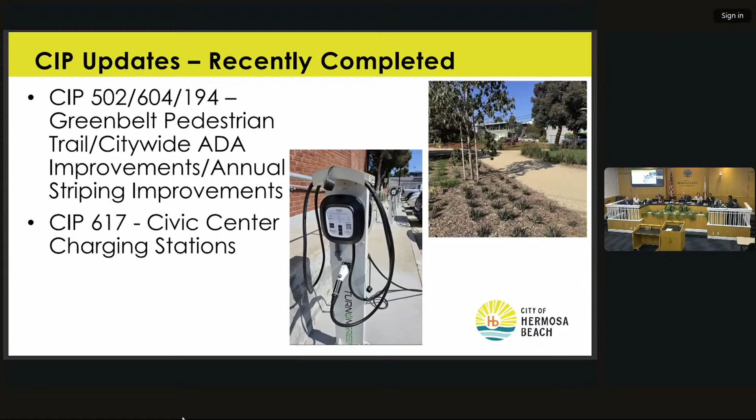Moving on to projects that are near completion. One of the projects I want to present an update on is the Clark Building renovations. We're expecting completion for the Clark Building next week. We have the final electrical inspection scheduled for later this week, and the final building inspection scheduled for early next week. That project was slightly delayed initially due to getting permitting from Southern California Edison.

Later on there was some equipment that came damaged, and we were just waiting for that long lead item to be delivered. It was delivered this week. It's being completed, installation, and we are looking forward to the final inspections. The equipment that was damaged was specialty lighting fixtures that also serve as emergency backup lighting, similar to the setup in here, around the edge of the council chamber wall and ceilings. Yeah, they're the linear light fixtures.

The next project nearing completion is the annual paving project, which included Lot A paving. The only item pending is final striping in certain locations. We're waiting to get the striping contractor scheduled for the final locations. The major portions—Pier Avenue, Valley Drive, Lot A—all the striping's been completed. There are a few remaining items where striping and signage is still pending.

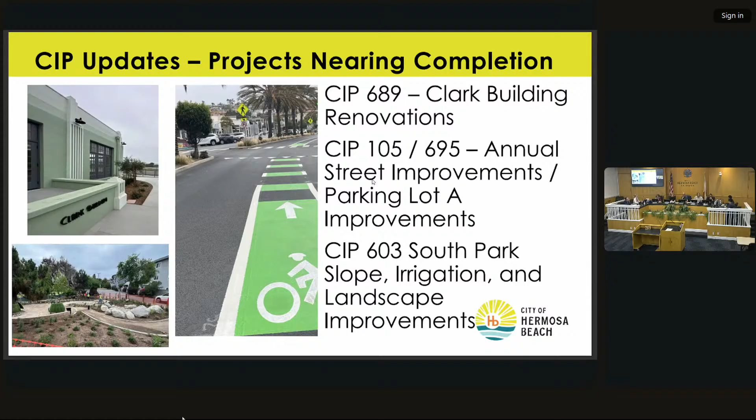I wanted to move along to some projects that are going to be awarded soon. We are planning to bring the Greenwich Village North Undergrounding Project to City Council for award this coming Tuesday.

And then CIP 630, the Community Center Gas Repair Project, is currently being advertised. We're expecting that to be bid opening later in August, then taking that to City Council in September, with construction starting in October.

As I mentioned earlier, Base 3 electrical improvements—that project's contractor has been selected. It's going to be on a faster timescale. It doesn't need to be taken to City Council for contract award, so the City Manager has authorization to award it, and we're looking to wrap that up in the next couple of months.

Kelly Courts improvements—we have finalized the design for Kelly Courts. It's set for advertisement next week, and it'll be bidding for about a month. We'll get that back, with start of construction for Kelly Courts slated for October 2025.

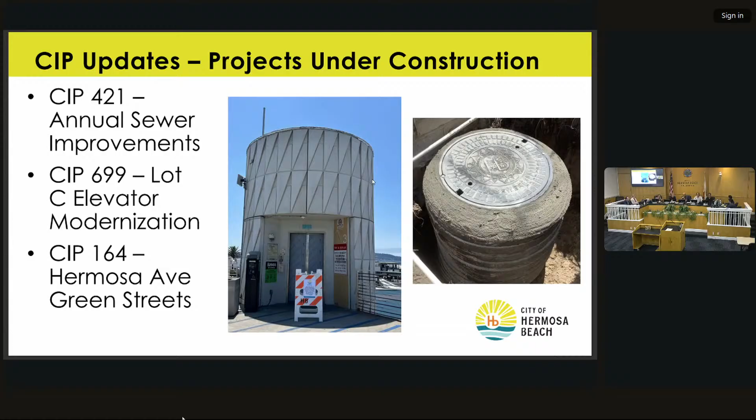And lastly, I wanted to touch base on projects that are in preliminary design. CIP 623, the next phase of pier structural repairs, we've received the design proposal and will be reviewing it to move forward. This design phase, similar to the last pier project, is expected to take at least about a year, and it will go through the Coastal Commission, which is a lengthy process. We wanted to get ahead of that, getting design done while we've already budgeted for construction later in the fiscal year.

The next project is the Real-Time Crime Center. Public Works is supporting the Police Department on the federal grant that's been received, providing support in evaluating contractors and ensuring federal grant provisions are met in the selection of camera installers.

Lastly, the update for CIP 111, the gateway and wayfinding signs project, which is in conceptual design. We were working with the designer to finalize the design scope, and that's been done. They're underway with the remaining portions of conceptual design. We're expecting them to present their findings with new updates before Public Works Commission prior to taking them to City Council.

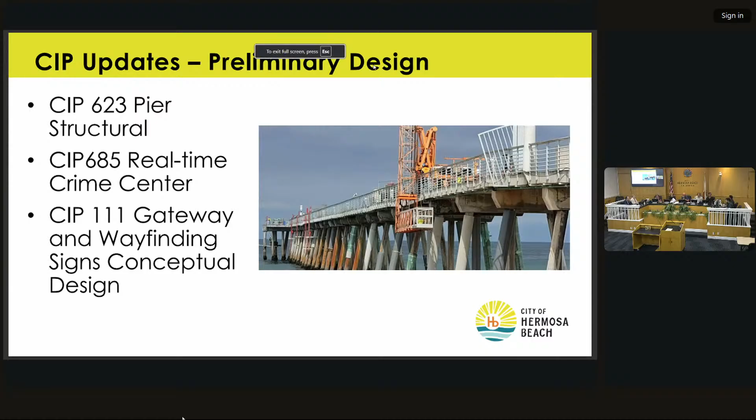No response to public comment. Any brief announcements or reports on subcommittee roles? Any comments on matters within the jurisdiction of the commission?

I have one quick question. At some point recently, they put a stop sign at the intersection of Monterey and Herondo. You know what I'm talking about? It was added about two years ago - it was a side street only, one-way stop, and Redondo added it. That intersection is mostly Redondo, is it not? We own the city limits, which are really the northerly sidewalk and the parking lane, so the majority of it lies in Redondo. I was going through there and it could use some rapid flashing beacons, but that's not under our purview apparently. Unfortunately, they're not compatible with all-way stop control - you can only put the RRFB system on a yield control intersection. The only other potential upgrade - there are other mitigating options, but that would not be an option at that location. Good to know.

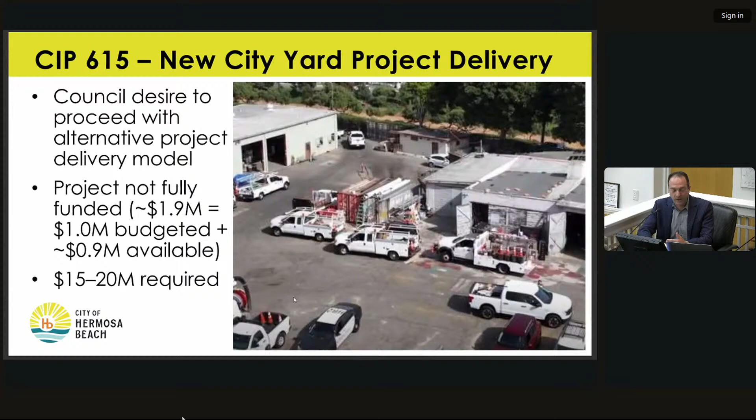And so with that, I'm going to introduce John Osqui, one of our senior consulting engineers that works very closely with our city team, who's going to take the commission through the two different delivery options in a little bit more detail. John, would you like the pointer or the clicker? Oh, yeah, please.

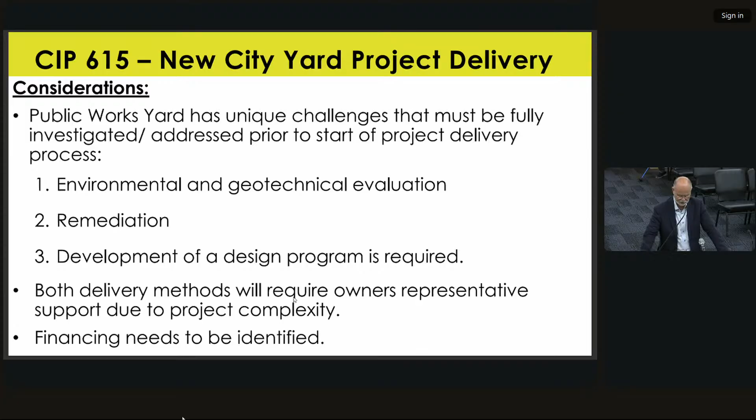As I mentioned in this slide, we try to outline for both options - option 1, which is the design-bid-build, and option 2, which is a progressive design-build, generally referred to as a PDB - the timeline for implementation, the different phases, and sequencing of the work.

You can see that the first order of business is environmental investigation. How do we do that? We go through a process of hiring a qualified consultant, which is called a request for qualification.

We're going to define what it is that we want to get done, then invite the qualified consultants to come in and provide a proposal to the city. We hire the most qualified consultant. By the way, as far as professional services, the law in the state of California states that you don't necessarily have to go with the lowest price that a professional consultant provides.

The basis of your selection is their qualifications - it's called qualification-based selection, QBS. So we hire the one consultant that we think is going to provide the best benefits for the product that we want to deliver.

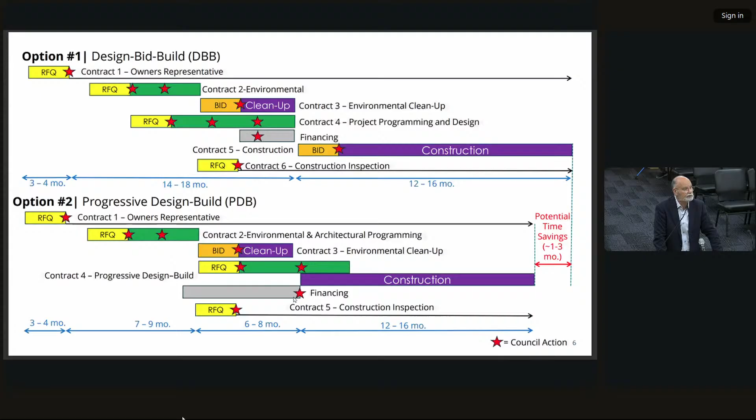We touched on that a little bit, but the selected approach will greatly depend on priorities of the city. We have to finally decide which project delivery method is the correct one for us. And something that worked for other entities won't necessarily work for us successfully, and vice versa.

Timeline: if the timeline is the goal, reducing the timeline, getting the project done in an expeditious manner, then the progressive design build should be considered seriously. If the goal is to have more control over the design process, and competitive bidding is preferred, then the design bid build, the traditional model, might be a better choice.

If the transfer of risk to the builder is a goal, then we probably have a better choice if we selected the progressive design build. But again, I qualified all of those as I discussed previously. It's not an absolute term.

As far as the budget is concerned, the progressive design build offers effective cost management due to its integrated approach, because all along the design process, the city is involved and you are looking at the cost for the contractor. But you have to keep in mind that at the end of the day, the contractor is there to make their profit margins more attractive to them and not to the city. So because of that, it does not necessarily guarantee the lowest overall cost.

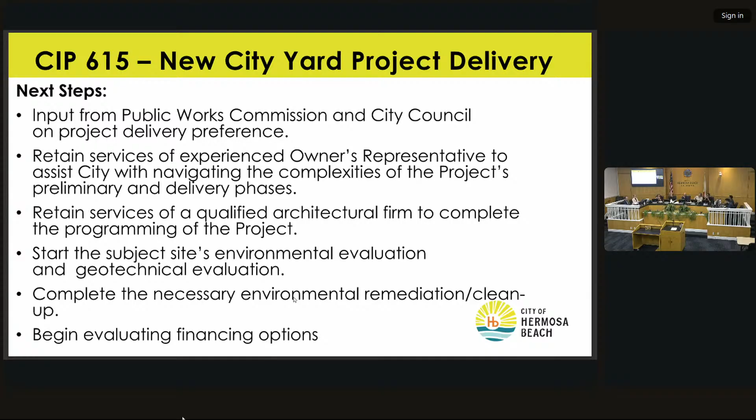Has anything been done with this at all? Has there been any assessment by staff or anyone else as far as what's needed? Or is this starting at the beginning? So,

Yes and no to all that. So we've been preparing, as you can see, we've laid out a plan of action, whether we go one road or the other to move this ahead.

There was a prior effort several years ago to take a look at, there was a CIP and there was preliminary design that was done. So we have an initial layout, but it was really a much more simplified proposal and it didn't really get into the detail that's needed. That was several years ago. Current operational needs and challenges are different than at that time when it was looked at.

And so we've had some preliminary look as we've started doing some of the facilities condition CIP with the Civic Center. We did start to look at some of the space needs, but it's very preliminary. We really need to get an architect team on board to really assess our needs. And when I say needs, it's the space configurations that John mentioned, like how many desks, how many parking spaces, but really looking at the flow of our yard, and that's something that we're going to have to work with the designer. How do we get a more efficient operation?

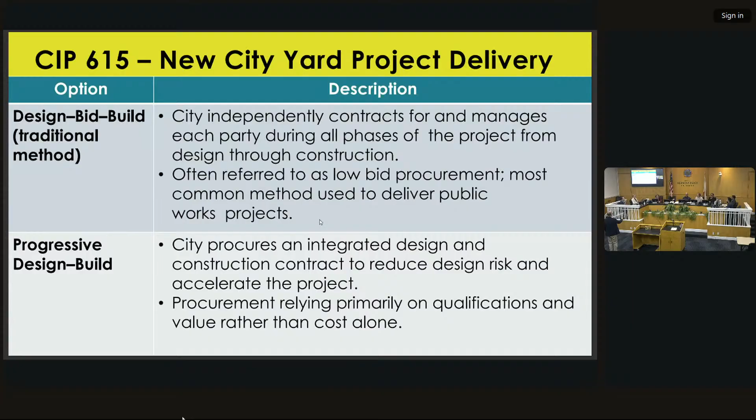I wanted to make sure you weren't discouraging doing too much design work early on, just because in progressive design build there's a lower required maturity level before moving forward. So if we wanted to, could we voluntarily, at additional architectural programming phase cost, do a little more work? Even though when we bring the design build contractor on they might say you're more mature than expected, maybe we could work with them on that, but we're not necessarily obligated to it. In other words, would we consider getting more value out of the architectural phase by extending it a bit to better define our needs and requirements?

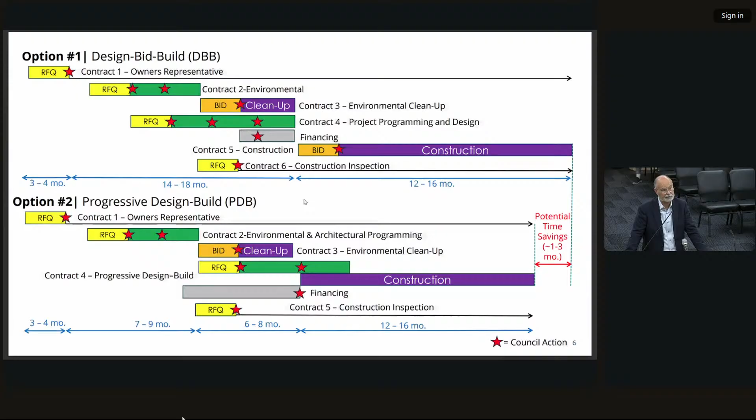There could be surprises. There could be a point where you're not going to agree with the price they come up with, but then you have to go through a lot of back and forth, examining the documents and the estimates they're providing. So there are no guarantees, Chairman, and that's where having a very strong team behind you is going to assist you. But the example you use is very different.

It was traditional design build. You had a number up front that was competitively bid. This was for a design build, right? Traditional design build, and in order for them to get that project, they had to submit a GMP as a bid. Yes, so you had a number, it was competitively bid at some point.

Yes. Whatever happened afterwards, that happens on every project. My question is, you're going to hire somebody just on qualifications, and they have no incentive to have a low price.

I think I mentioned that when hiring a design build team, either through the traditional or progressive model, we have to keep in mind that the driver in that scheme is the contractor, and the incentive for the contractor is to maximize their profit margin. That's just the reality. When you go to design bid build, that gets tempered a little because they have to compete against other contractors. In design build, they're competing as well.

Design build teams are competing against one another when submitting their proposal to you based not on price, because in a progressive model you're not getting a price up front, but based on their qualifications. Right, but traditional design build, they are also competing on price, correct? Yes, yes.

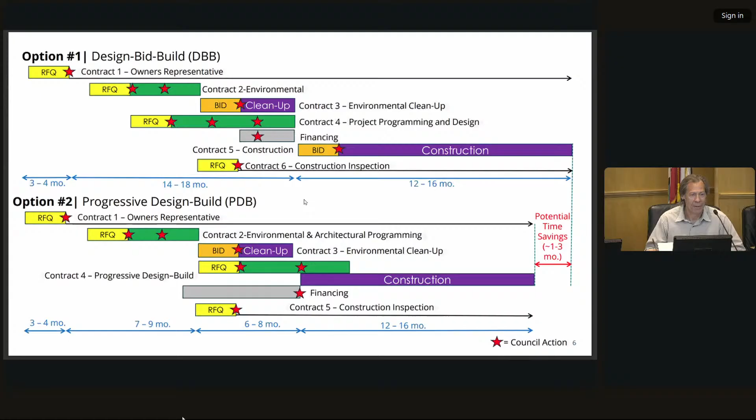The purpose of programming, again, as I alluded to and as Mr. Sanclemente mentioned, is based on your current needs and future needs—defining a picture of what the facility is going to look like, the square footages, adjacencies, those kinds of things. But as far as getting into the future relationship between the city and defining milestones for the future relationship with a design-build team, no, that's not part of that exercise.

Would we still be laying out a preliminary schedule for how we'd like to see the program unfold? Not as part of the architectural programming exercise, no. Okay, so in my opinion, the word 'programming' is a little misleading because it's more technical than it is programmatic, but okay. It's terminology that my architect friends use, and we stay with that. Okay, okay.

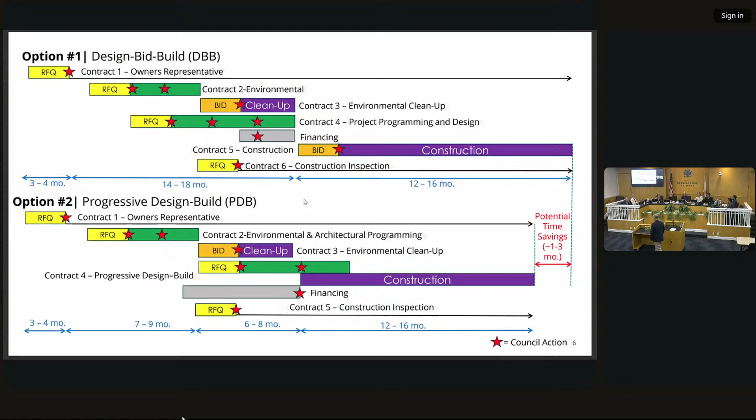All right, thank you. You're welcome. Anyone else? All right, do we have any public comment in the chambers?

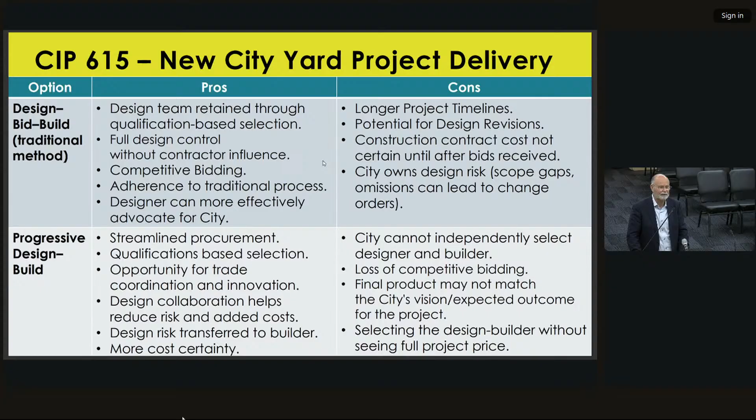I have a big problem with this, not in overall concept, but with how this would work in this city. I can't imagine the line of people who would, if this project went bad, be out that door and down the street saying, you guys went to contract without a final amount. How in the world could you commit the city to this? How do you award a contract without an amount? It's basically an open checkbook. And I'm not saying that's exactly what's happening here, but if this job goes bad, you're going to hear people say that. I really dislike the idea of not knowing even basic costs. What is the fee on the project going to be? What are the GCs on the project going to be? What's the design cost going to be? Without that information, I don't see how you go to contract.

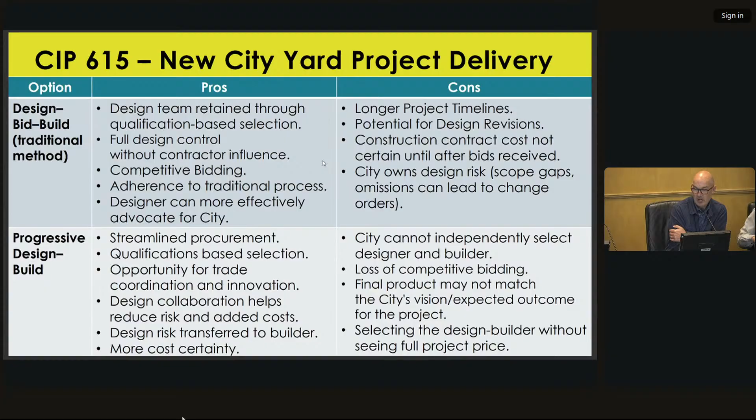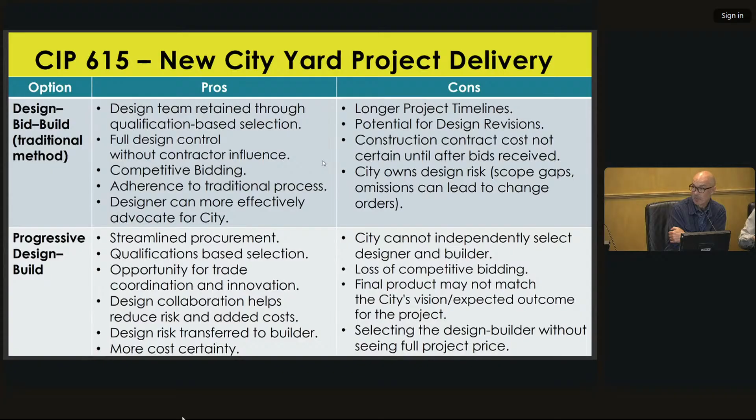We've seen on multiple projects, including the Kelly Court and the Clark Building, that the council likes to make changes and sometimes design from up here. Once you start a progressive design build contract, even in the early stages, the clock has started on that contract for that contractor. If the council makes changes, boom, next day, change order, delay. You said how important it is for a contractor to get in and get out. When council makes a change, they're going to have their hand out immediately. Everybody worries about change orders during the construction phase, but you're going to have change orders in the design phase too. I don't see how this turns out well for us here.

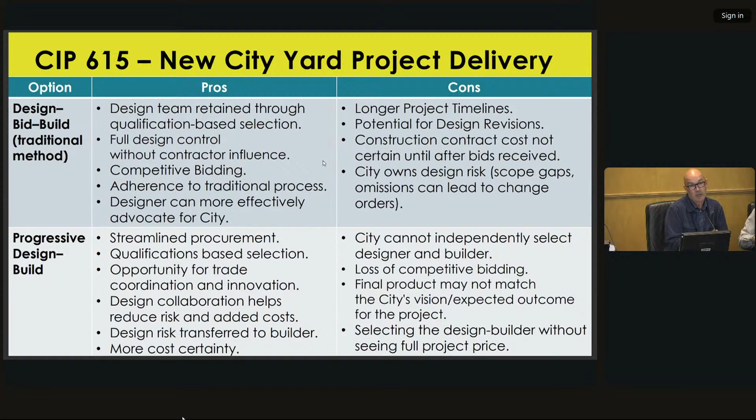David talked about the opportunity for city input. In my mind, you have just as much opportunity for city input with design bid build or design build. With design bid build, the city has input with the architect and all of the consultants as they're putting the plans together to get it ready for permit, and then it basically stops. Whereas with progressive design build, you're kind of more through it. So the city needs to do their homework and work with the design team up front. I don't think you lose anything as far as city input with design bid build. I really...

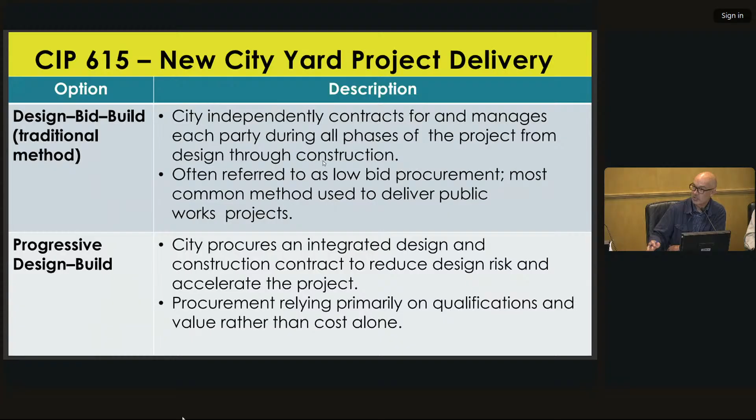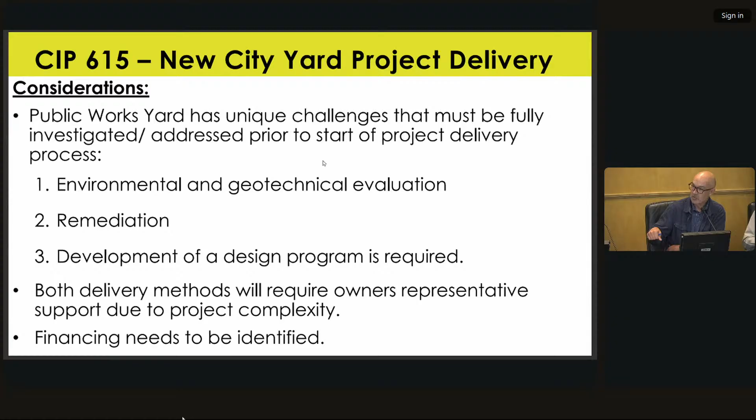My daytime job is I estimate construction projects. It's what I do for a living. And if you don't have a competitive situation, the contractor is going to put their thumb on the scale to protect themselves. They're going to put line item contingency in every line item, and then, oh yeah, we're giving back the contingency at the bottom, but all that line item contingency is still going to be there. And you have no way of knowing it.

I don't believe that the books are going to be as open as you think. I think you need to see every subcontractor bid. I think you've got a line in here about the construction manager will solicit bids from key trades. Why is it the construction manager? It should be the contractor. The contractor is the one with relationships. The construction manager is a retired guy who's got back into the business, and his relationships with the subcontractors are 5 years old. There's too many things, and I cannot support this.

I said, anybody else have any other comments? I just wondered if there's any response to that. To which part of the points, excellent points that were brought up. And I asked a question. Please, let him respond to mine, please.

If I may, before any of that, and in full transparency, I'm relying on ChatGPT with regards to the question you asked, which cities have completed a project through progressive design build. These are the lists that I have in front of me, and I don't know if the project has been completed or they have just started.

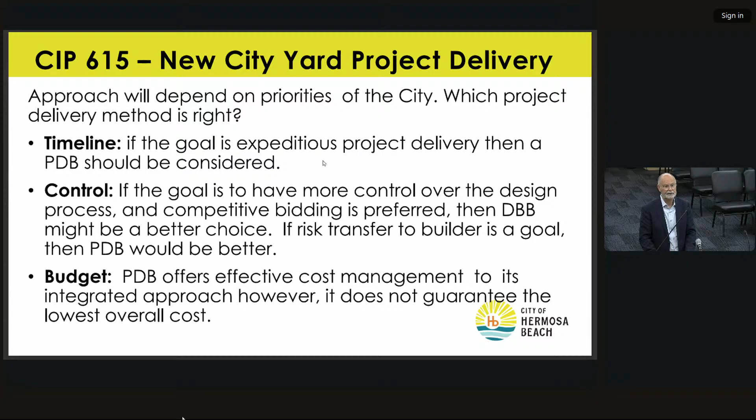Well, I think we are trying to paint a picture of all the pros and cons, and then based on that, urge you please to guide us to which way you think is the best way for the city to contemplate on completing this project. So Commissioner Britton asked for you to refute everything that I said and tell me how wrong I am. And I'd like to present that opportunity to you. I was nodding my head in agreement with everything that you were saying, Chairman.

So my understanding then is, I guess the point is, once we turn it over, the city loses control. And then the architect and the contractor do what they do, and we have no control after that point.

Commissioner Britton, I went back to the slide and put it up there for us to take a look again. Honestly, it all depends, and I think the chairman made a mention of this, how a model is best suited for a type of operation and decision-making process that we have. Some cities operate differently than others. I have witnessed, and I'm looking at it from the outside in. I've had the good opportunity to work with your team for the last 2.5 years. Every project I have been a part of, small or larger scale, there has been a tremendous amount of collaboration, deliberation, and stakeholder participation. And this project, as you mentioned, Commissioner, is not going to be an exception.

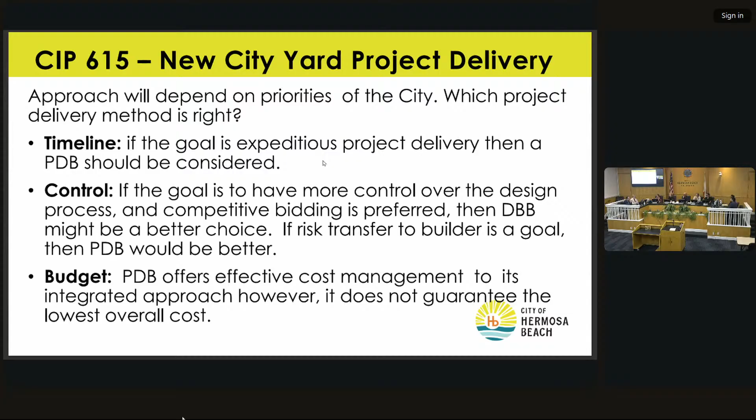I'd like to add one more thing, too. Thank you, John. There was a comment Commissioner Grayson made, and I think it's an important point, that if we were to consider the progressive design build model, there's the incentive that it offers more schedule control, that it's tighter. We're committed to a quick, fast-moving schedule. And if I'm interpreting what you said correctly, it seemed that would help encourage council to keep moving with the project and move it along. And I think one thing I want to emphasize is no matter which way we go, I can't emphasize enough how much this project needs to get done under either method. I think staff will continue to push to get this done because I really do think we are at a critical point with the yard.

We need to fix it. I think we've kicked it down the road far enough. It needs to happen under either model. I think where I have some concern with the progressive design build schedule is that if there are milestones, that does put added pressure on staff, or where we need to get decision points for council and commission. And so when we looked at the overall schedule, I mean, you said it best, it's really a wash. Maybe we save some time, maybe we don't with one of the models. Overall, we're looking at a wash with the overall schedule. It's really going to be those choke points. Our staff is slammed day to day. We can't predict the ebb and flow of emergencies, unplanned work, other priorities that are going to come in.